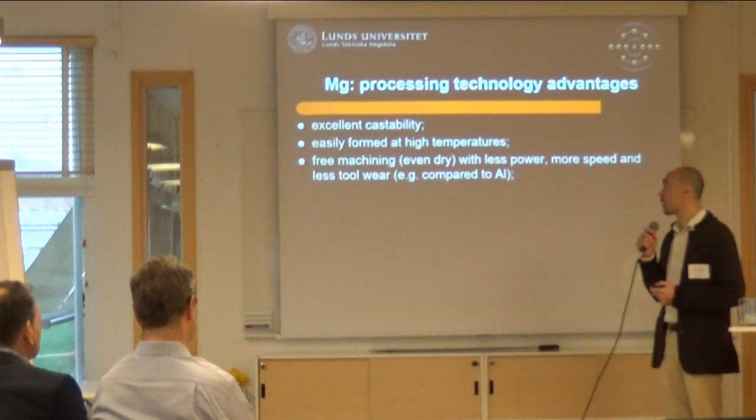Why is it beautiful for business? In general it has excellent castability - I have an example of that from Ford, they make huge advantage of that property. Basically at casting temperature it is much thinner than aluminum, so you can make thin walled products quite easily with magnesium compared to steel or aluminum. It's easily formed at high temperatures, although it is known to have very limited ductility - but with high temperature it is still excellent to work with. Then machining is easier, let's say, not better, but easier than aluminum. It has its own issues, but weldability is still there as well, especially with restrictions to welding.

It's a really good technology for welding. And as I mentioned already, in the modern alloys, it is not flammable if you don't want that.

When it comes to abundancy, magnesium is very abundant. It is the fourth most common element on Earth, behind just iron, oxygen, and silicon. The most abundant source is dissolved in seawater, so we do have lots of resources. Even in our body, most of us have at least 35 grams. It is an essential element in the body.

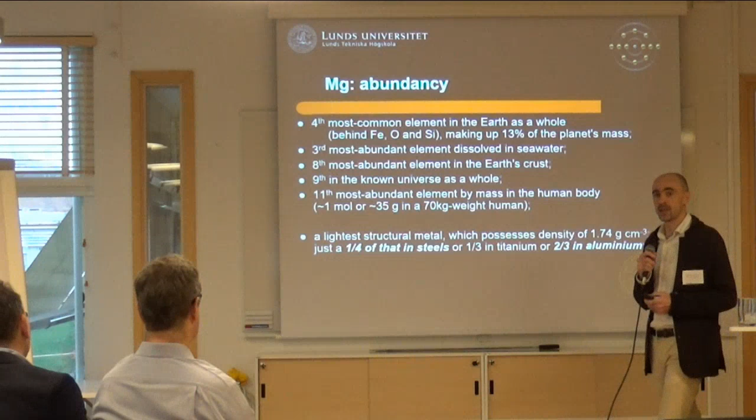It is the lightest structural metal, just a quarter of the weight of steel, and two-thirds of aluminium, one-third of titanium. And it is fully recyclable, which is important in the modern view and the awareness about ecological impact.

What is really interesting and puzzling is that in 2016, when the list of critical materials for Europe was compiled, magnesium was on the list as one of the most critical materials for Europe. The reason for that is not really the existence of magnesium as such, but the cost of technology and manufacturing. This list is compiled based on the supply of sources, not only abundancy.

But new technologies have emerged. It used to be the Pidgeon process, which was very dirty. At the stage of using magnesium, it is fantastic, but at the stage of manufacturing, CO2 emissions were enormous, and China at the time did not care about CO2 emissions, so they used it in bulk. Now they have developed much better technologies, reduced CO2 emissions, and developed much stricter regulations themselves.

On top of that, in Europe we do have resources. We have dolomites here in Skåne, so Sweden does have a lot of resources for that. In Finland, the mining companies that mine nickel and copper have around 40% in stock water from the mines, and they're striving for companies who would help them recover magnesium from there. In steel manufacturing, you can also recover a lot of magnesium oxide. So it's just a matter of developing proper technology for having it here. I would like to encourage this business as well. I think we're ready for that.

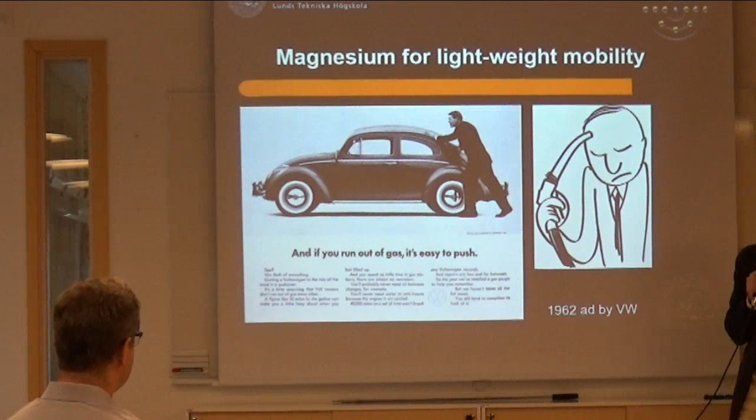So, lightweighting in mobility—just wanted to show this figure, something very modern, with petrol and fuel. And then another picture, which was Volkswagen in motion from 1962. I love in general how Volkswagen is an extremely creative team in promoting, and they were first introducing this Beetle model in 1962, and that is fantastic, I really love it.

So apart from all the beauties of having it, when you move the car, no matter what the propulsion is, if the vehicle is lighter, it is easier to move it. This is fantastic if you get stuck somewhere in the woods. For Sweden this is very important, especially if you're up north.

One more important thing here is the targets. The recent administration in the States has a slightly different opinion, but the targets, at least, cannot change. For light duty vehicles, these targets were set in 2015 and are still in place, but I want to pay attention to the aggressive figures for 2050, when the total vehicle should be 50% lighter than it is now.

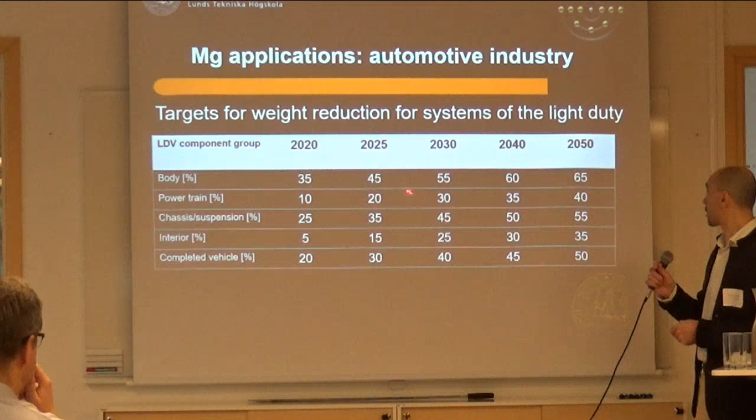The thing is, what we are stacking into the car these days with electrification is that vehicles become much heavier, because you take out steel and put in copper to make it work in electricity and electric batteries. But you save weight on the body quite a lot—65% can be saved in the body because of the use of light metals.

In this business, aluminium did a fantastic job. They pushed hard against the steel business, and that's what Ford came up with for body-in-white using aluminum—and their magnesium response was that.

Again, it was Volkswagen, actually 1939, for the Beetle. A little bit more modern example is the research center, Helmholtz-Zentrum Geesthacht, which they call MAGIC.

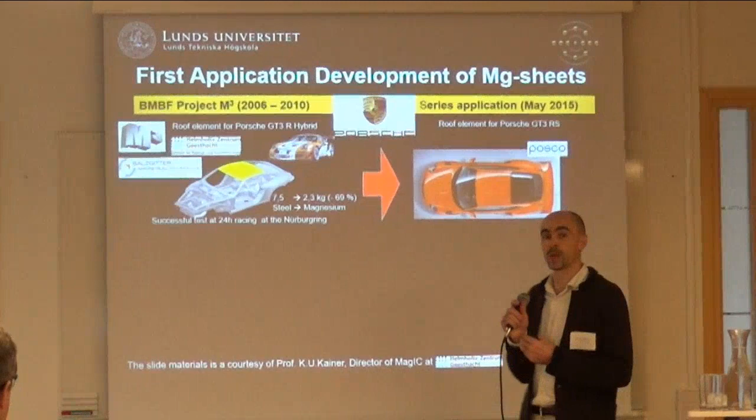Magnesium Innovation Center, it is the biggest research center on magnesium outside of China, and they came up with a BMBF government-supported project when they developed a new grade of magnesium alloys as sheet metal and the technology for its manufacturing.

And magnesium in general as a cast form, it comes and goes all the time, but in sheet metal form it has new applications. There is a secret that Tesla also has magnesium in quite a large quantity, particularly as luggage retainers as well. They don't talk too much about that, they're very secretive as a company in general.

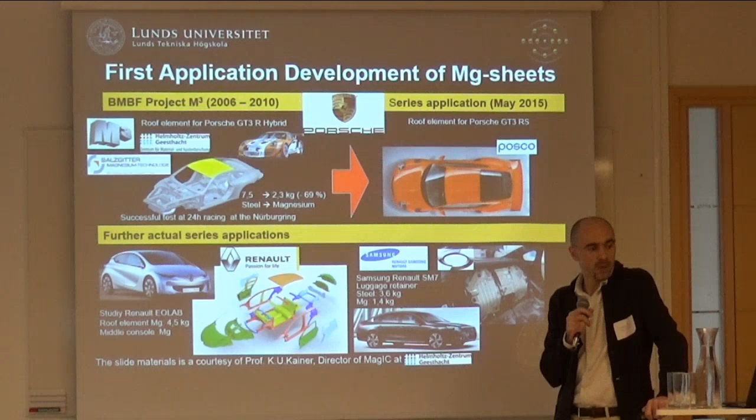So it is opening up. POSCO invested heavily and they developed technology with Samsung on the twin roll casting of magnesium. The volumes are far from those in steel and substantially less than aluminum, but the targets and technology are there. It's just a matter of market uptake, and magnesium as a long-term investment takes some time. Companies invest heavily now in aluminum, steel, new grades of steel, which is another story.

Apart from the apparent lightness of magnesium, another good property is castability. This is an example from Ford, where the steering wheel core was originally produced from 5 pieces of steel, which you need to cast, then machine, then bolt in. When they managed to use magnesium for that purpose, it was just 50% less weight.

But the major improvement in cost efficiency actually came from the absence of necessity to assemble. So they could cast a single piece, which was impossible with steel but became possible with magnesium. Then Hydro, for instance, being an aluminum company, they invest heavily in magnesium technology. So there are a couple of big American companies that invest in magnesium, being aluminum companies primarily.

Then energy saving, low density, high strength - these are just the figures for fuel saving, again important. In this case it is combustion engines, but still it holds for electric vehicles. Then there's the acceptable price for magnesium.

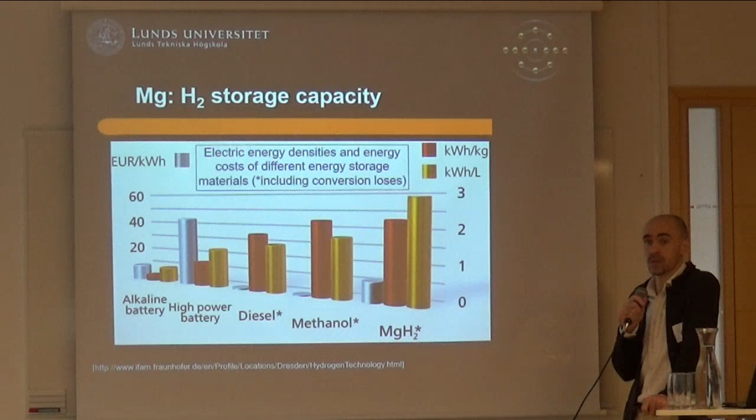This diagram shows the efficiency of energy storage per kilogram or per liter of fuel and the price efficiency with gray bars. So if you look at it here, the hydrogen storage capacity of magnesium as hydride is pretty nice compared to diesel or methanol or even a high power battery, and especially when you look at the cost, it is much more efficient than the battery. There are some issues, it is not as bright as you want it to be, of course, but the potential is there and it is quite enormous.

Body applications, structural metal applications in the human body. As I said, magnesium is a bioresorbable metal. If you look at this table here, if you compare magnesium to natural bone properties and all the modern alloys, metallic materials that are used in this business, magnesium has the closest mechanical property to natural bone. On top of that, it is perfectly biocompatible. It is not toxic. There are no issues as with, for example, cobalt chromium alloys or stainless steel where you have vanadium or chromium.

It is bioresorbable by body fluids. So it is absolutely a fantastic metal to use as a bioresorbable implant. Unlike titanium, for instance, if you have a temporary implant, you put it in the body once, and then it gets dissolved by the time the bone gets healed. You don't need to have a second surgical invasion. Beautiful. There are a couple of issues.

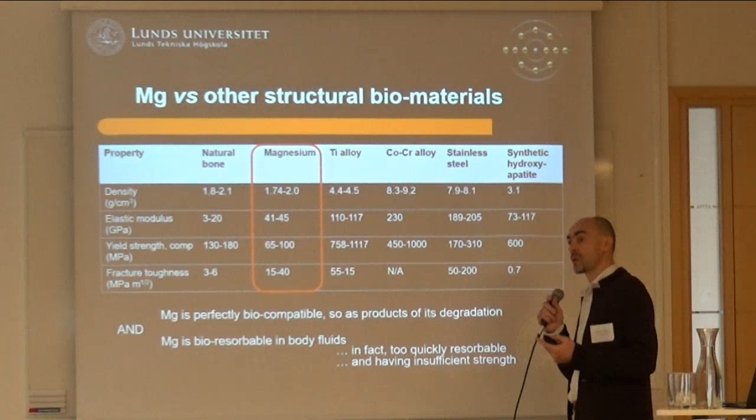It is resorbable too quickly, so we need to control the rate of corrosion or degradation, and we need to improve structural efficiency. So we are working in these directions. We are working on the development of magnesium alloys, tailoring the technology, improving structural efficiency, and looking into the degradation, which is probably the major issue right now in magnesium alloys. That is something which we developed recently.

3 minutes to finish off with that. That's exactly what we're going to do now.

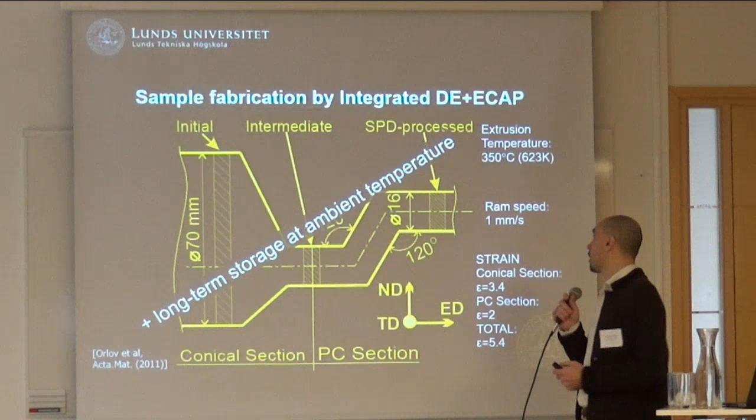So that is extrusion technology. You have a round bar, in this case it was 70 millimeter, and then in one go, we have a conical die, and then it goes through this bent channel, with a parallel channel extrusion. Then we accumulate much larger strain in our material. After the processing of such a bar, and we managed to produce 4 meter long bars in one go, from the initial material condition, which was just a hot extruded state, we got improvement of both strength and ductility because of controlling 2 main parameters.

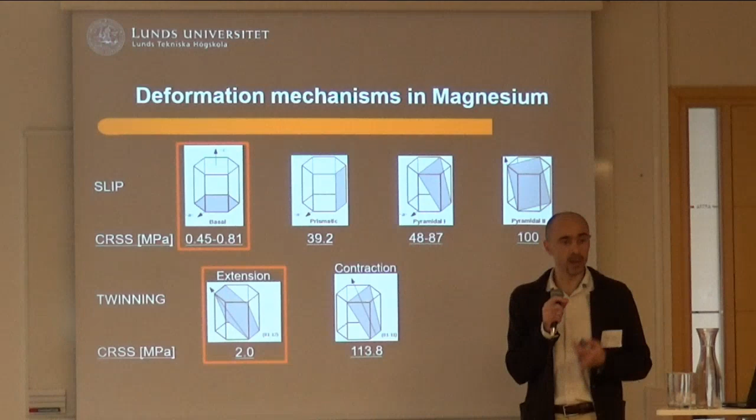Sorry, one educational slide about magnesium. Unlike copper or steel or aluminum, magnesium has a so-called hexagonal close-packed lattice, and the strength of magnesium is controlled by plastic deformation by slip on this basal plane and so-called twinning. The combination of these two systems, if you look at the critical resolved shear stress necessary to initiate plastic deformation in your material, they're working in parallel and they're quite soft. So basically the structural efficiency improvement can come by restricting plastic deformation in these directions. And this can be achieved by controlling the orientation of these blocks and controlling the slip itself by some precipitation hardening.

If this is the unit cell of magnesium, typically in AZ and AM series magnesium alloys, that are aluminum zinc and aluminum manganese alloys, typical cast grades of magnesium, the precipitates are usually in the basal plane, and in ZK series, which is zinc zirconium alloys, they will look like this. And they're absolutely not efficient for improving the strength. And then there are WE series alloys. These are alloys containing rare earth. They're more structurally efficient. They have precipitates in this position, which is quite difficult to develop.

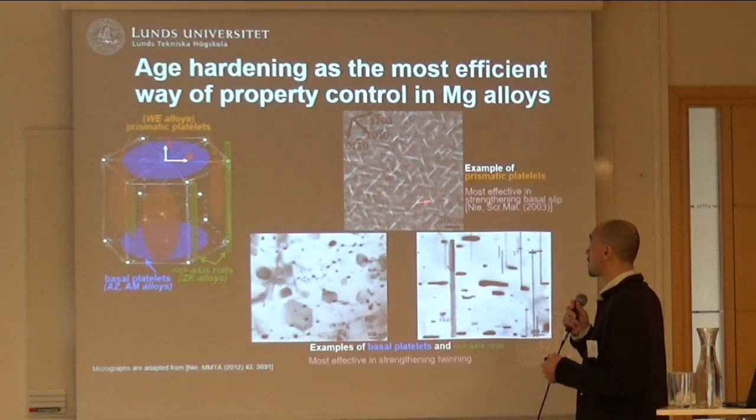What we've done with this ZK60 alloy, which is a zinc zirconium alloy without rare earth, we developed this type of precipitates. We discovered that in our alloy, with the processing which we could do, zinc is a precursor for such features in the microstructure. What we found with transmission electron microscopy in the lab is that we can develop this type of precipitates right here, like this, that are more common for rare earth containing alloys. We found it in a system without them. So we don't need to compete, for example, with electronics.

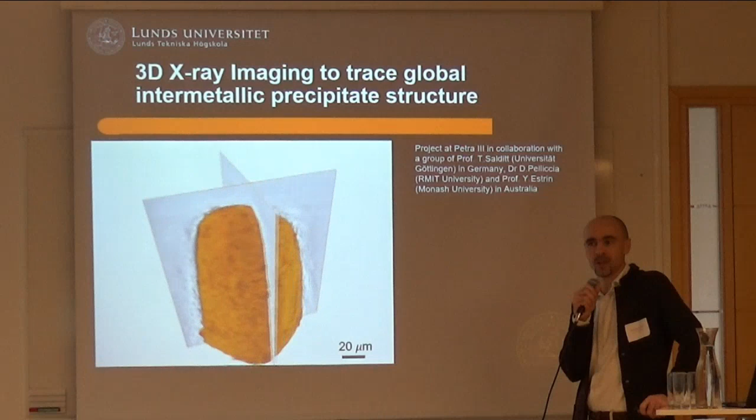So then it was X-ray imaging where we demonstrated that the morphology can be changed. In this case, it is PETRA III, not quite MAX IV, but MAX IV at the time did not exist with its imaging capacity. Now, MAX IV is actually fantastic for working with light metals because the beam quality and the energy range are really great for revealing different features and analyzing them really nicely.

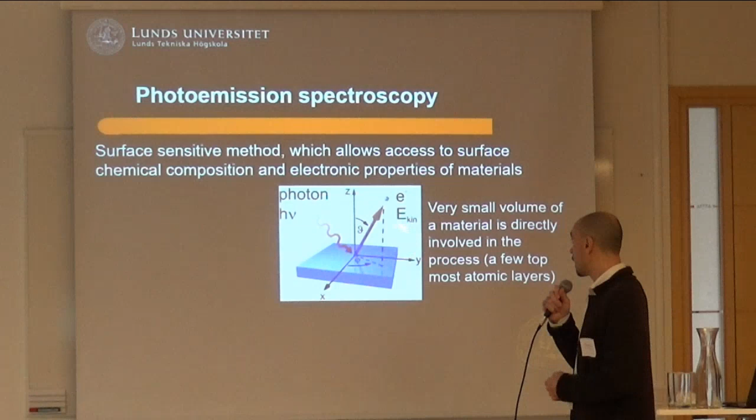Then the main strength of MAX IV is surface science, where photoelectron spectroscopy is used. And in this case, just by bombarding photons, you can analyze really early stages of oxidation. Magnesium degradation is a big deal. Everyone is talking about that. In practice, no one knows what's going on at the surface. Right? So what we are trying to do is to actually understand what is going on there. MAX IV is probably the best facility in the world for doing that. So we are actively involved.

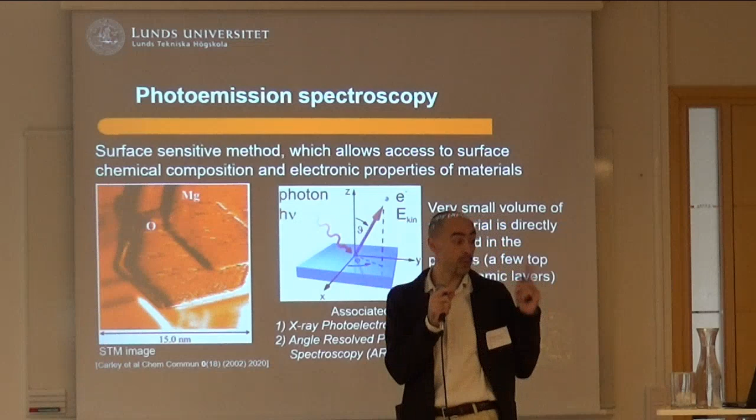But then we developed an in-house facility for magnesium oxidation in an aqueous environment, and from that we come much closer to real-life applications. In the synchrotron, it is still very much a staged experiment. In the lab, we have just a real-life alloy, real-life fluid, so we can do it in a bulk state, and we can analyze every stage of magnesium corrosion and oxidation.

Just a brief summary, we ran out of time. So magnesium alloys appear very attractive, and there are milestones in certification for biomedical and aeronautic applications, and automotive is there as well. And we're trying to make our own contribution to improving that.

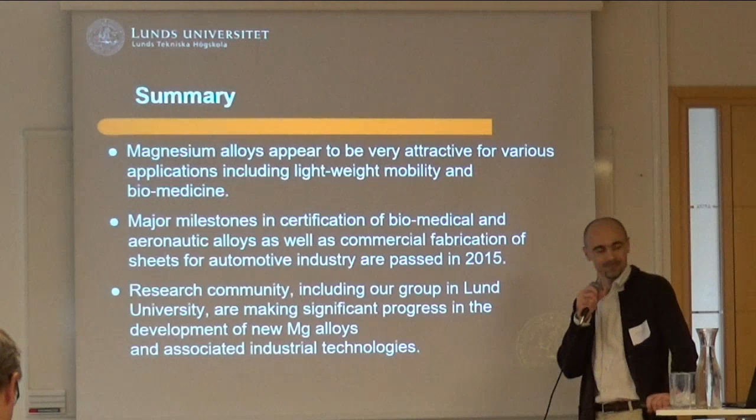What about mining of magnesium? How does that compare to, say, aluminum and iron? Are there any issues with mining? There are no issues, and Skåne is, in Europe, one of the best places for it. You have dolomites, and then you calcinate, and it used to be a very dirty process, as I said. It's Pidgeon. We need chlorines, and yeah, it wasn't as nice.

But there are modern technologies with electrolytic methods that can allow that to be a lot more sustainable with effectively no CO2 emission. So usually you mine it as magnesium oxide, right? It's like milky water. You can actually buy it in a pharmacy. It's a muscle relaxant. And then you need to reduce it. Yeah, and chemical methods are available there.

It's interesting that, for example, Becker uses magnesium oxide in their heating technology. So you do not really have to use magnesium as a metal. You can use magnesium oxide. And then there are some technologies now for storing excess heat with magnesium oxidation and hydroxylation. So these are two reactions. Normally magnesium oxide is not stable in the atmosphere, so it hydroxylates. And while doing that, it generates heat in quite substantial quantity.

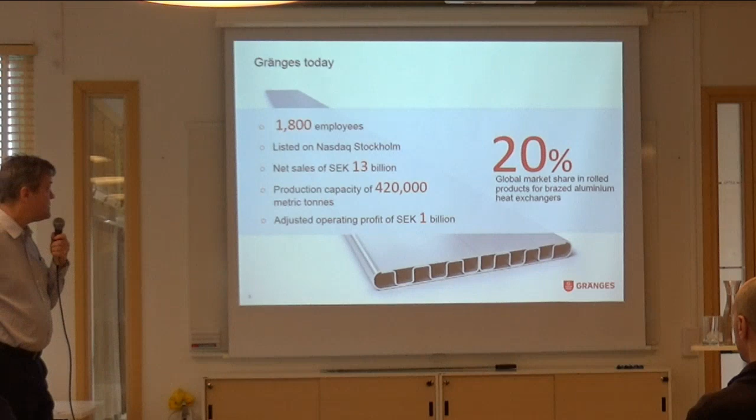So, as I said, Gränges is a publicly listed group. We have a revenue of 13 billion Swedish krona, and we are located globally. I will show that in a short minute. And we have, for quite many years, been focusing on a specific type of material: brazing material for heat efficiency, especially in the automotive industry.

So we have production in Sweden, Finspång, south of Stockholm. We are located in China, Shanghai, and we also have a production location in the US, in Tennessee. Last week we actually announced the acquisition of a big rolled aluminum company in Poland. We're very happy to get them on board.

This is the type of material we are using. It's a kind of clad material, a sandwich type of material, where you have a core alloy and you have a so-called filler metal. I will explain very shortly here about the basic process. And then you also have another layer on the other side, a second type of liner, which you normally have, for instance, in tubes. You see the heat exchanger there and different components. So the heat exchanger consists of tubes and fins and so on.

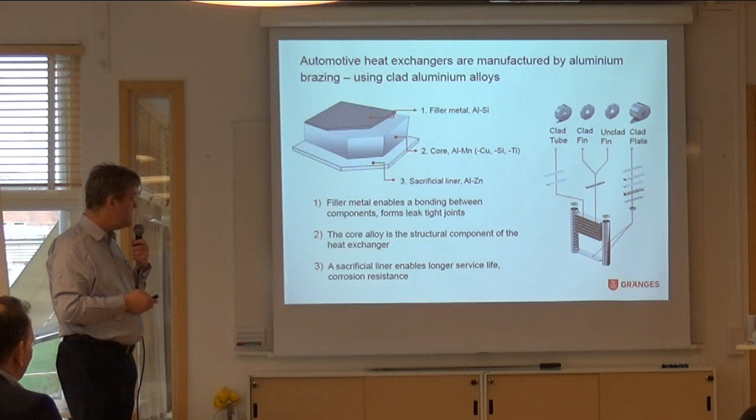So this is the type of process that our customers are using. It's a joining process basically. It's called brazing. So what is happening is that you have this clad material. You can see it down here, to the right. You have the core alloy, you have the filler metal, and you have a secondary liner as well. So what's happening is that you are heating this up in a furnace basically.

And then you get the joining process at the temperature here up to 580 something. And then you get to 600, and then you get this kind of joint formation. So the beauty here is that the filler metal contains silicon, so it has a lower melting temperature compared with the core metal. And that's why you get this kind of joining.

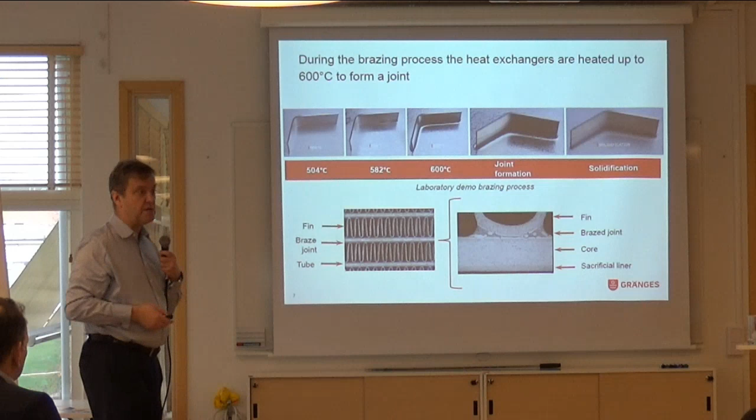So this is something that the automotive industry has been using, the brazing technology, for quite many years. Around 30 years ago, copper was used in heat exchangers; due to price and the weight, aluminium was then basically penetrating this market. And today, I would say more or less 100% of all heat exchangers you use in the automotive industry, trucks also, are of aluminium and use this type of brazing sheet material.

So a little bit about challenges and opportunities for aluminium. And once again, Gränges has been, I would say for 30 years, focusing on this kind of brazing sheet material. We have not really been into other types of material. Today, you see more and more aluminium in automotive applications. Dmytro showed this before here, magnesium. And you can see that more and more aluminium is used in the automotive. The advantage then with aluminium is the lightweight.

So starting a little bit from above, what we see from Gränges side, where we have kind of challenges in the future, there's a lot of things happening right now. It's urbanization, driving, of course, transportation, vehicles, and so on. Digitalization is an important trend as well, and the last one, I think many industrial companies now are really putting focus on this. As Dmytro mentioned about the recyclability. But sustainability, recyclability is a term that is becoming a very big thing for the future, really, for the industry.

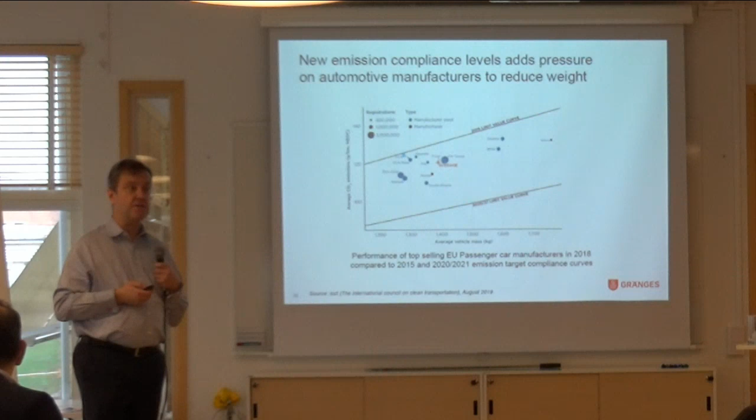That's why the interest now for aluminium is there. Magnesium also coming up as an alternative material. It's a kind of exciting period coming up right now. I think we want to talk more about that later on for the automotive industry. And of course, big challenges as well to meet these emissions, and of course, do it on an industrial scale. That's the kind of trick here. Really a challenge, I would say, for the industry. From Gränges side, we are affected also.

If you're just talking about heat exchangers, which is our core product, definitely these are two big drivers for us. I mean, energy efficiency in that field is very important. So if you're talking about electrification, compared to the combustion engines, you generate less heat, so you have to solve that kind of problem from a thermal management point of view, which is a challenge. Carbon emission, I'm already talking about.

So when you're designing this thermal management system, as we are focusing on from Gränges side, of course, you have to consider these kinds of things. And of course, it affects the heat exchangers, and it affects the material requirements as well. Cost efficiency is another thing. I think it's a little bit of a perfect storm right now when we talk about the automotive industry, which we at Gränges are very much supplying to.

Right now, especially when we have a slowdown in the automotive demand, especially in Asia, but also in Europe, at the same time we have the requirements of emission, we have the change of powertrain, which is a very big thing. So I would say right now the whole industry is almost stopping the development of material or components for the ICE, internal combustion engines; all R&D, all development cost is very much put into electrification and new types of powertrains. I think Johan can mention this, but from a general point of view, that's very clear. That's something which is happening right now.

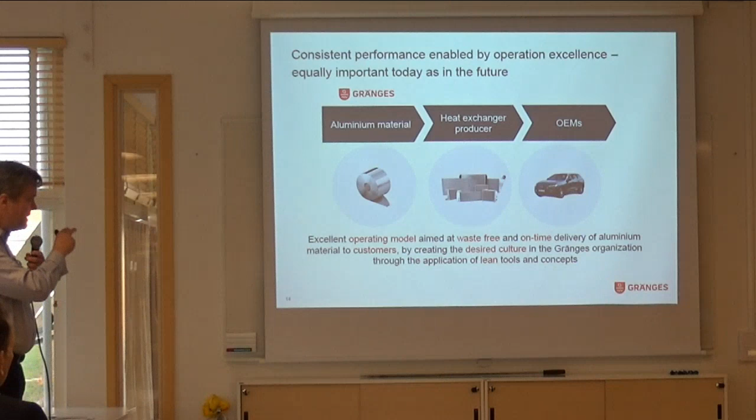This is, of course, also from an industrial perspective extremely important when you are in mass production, especially in an industry like automotive. Everything is about consistency, everything is about retaining the same product quality. From a material engineering point of view, it's many times interesting and exciting to talk about the most optimum type of material. But the fact is that the consistency in product quality is actually more important, because that is a must in order to reduce the cost, which is what everything is about in this type of industry.

Really. I think that's very important also in academia, to always have this in mind, that it's not always the most optimum material solution which is the winning technology. It's in fact from a total cost perspective, and this is very much a driving force for the total cost: to have a consistent process, to have consistency in the product quality. That's still a must, and it will be there also for new powertrain and electrification. Right.

Gränges is active in something called the World Material Forum. It's a French initiative focusing on the material industry's role in the new world and the importance of sustainability. And being in the material industry, I think sustainability is becoming critical. The fact that the resources are limited. We talked about recyclability before, running out of magnesium.

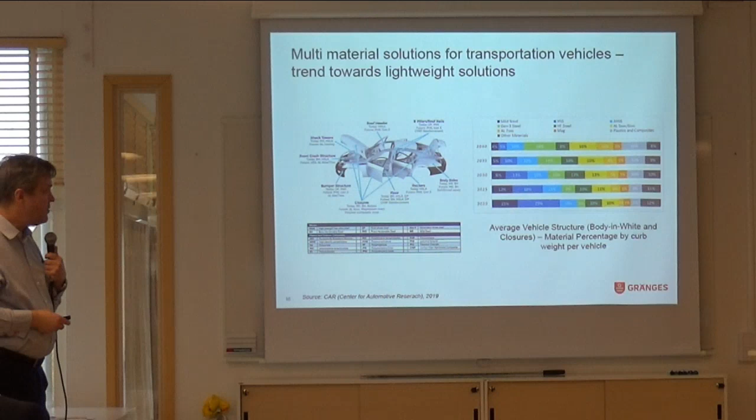You also have non-metallic material, composite material, which I think is also becoming relevant. There's a lot of discussion around cost as a disadvantage, especially for composite material. But if that industry can solve that, then you have a quite interesting possibility for that type of material.

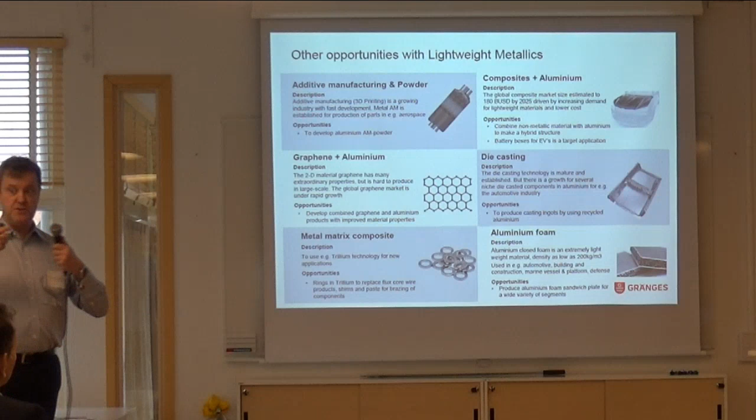I'll show a couple of opportunities here from lightweight metallics. I won't have time to go into details, but just to show what we, and also Gränges, are looking at for future development. AM, additive manufacturing process technology, is extremely exciting. We see some real development.

It's been an industry that's been very much on the hype curve, going down, and probably now going up a little bit step by step. Bigger and bigger interest. The fact is there are possibilities, for instance, even for aluminium in terms of aluminium powder.

Composite, already mentioned, and you can also think about combining composite with aluminium, for instance, as layers of aluminium and composite together. That exists. Once again, here the process cost is the issue. Die casting is an old technology, but we're also interested in it.

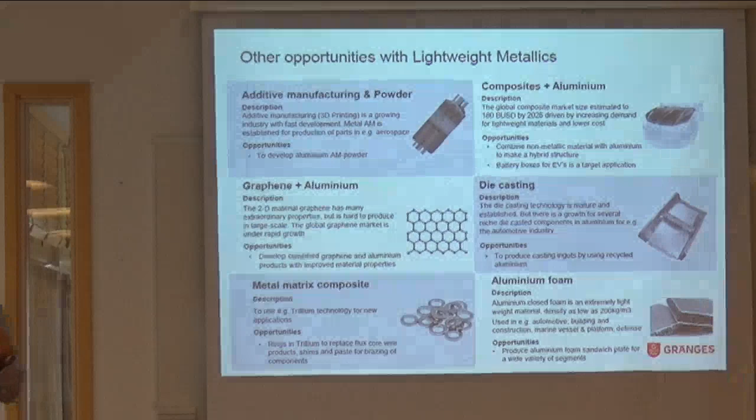We see opportunities related to, for instance, electrification components, new requirements, but also the fact that we can use more recycled materials, which is important.

Graphene - I won't explore or talk more about that, but the fact that if you can manage to incorporate graphene into, for instance, aluminium, you can see interesting opportunities in that type of material. Incorporating graphene into aluminium would be a very interesting new option.

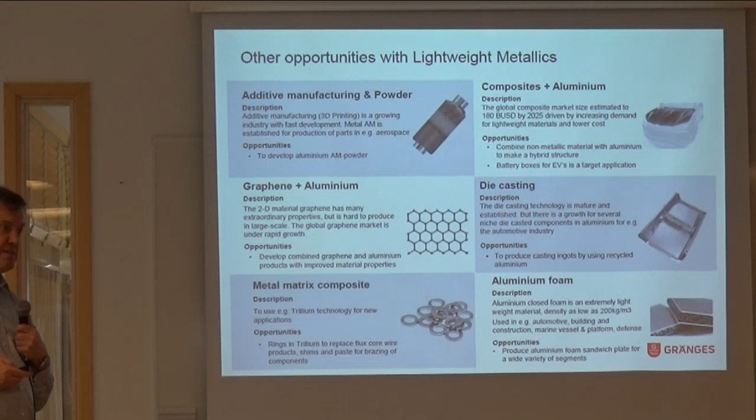The last two here: metal matrix composite, that's actually what I talked about before. In our example, one part is an aluminium foam finally, something which has been in development stage for quite some time. There hasn't been any breakthrough consistency here yet, but there are interesting properties and opportunities. So, in a way, it's an interesting period with a lot of new possibilities for aluminium and aluminium applications, I would say.

So for us, looking at the future global trends, what's happening in automotive electrification is kind of exciting, I would say. At the same time, very challenging.

Energy efficiency, lightweight material solutions, and also utilizing artificial intelligence for material use, moving forward. So this was a little bit about my presentation.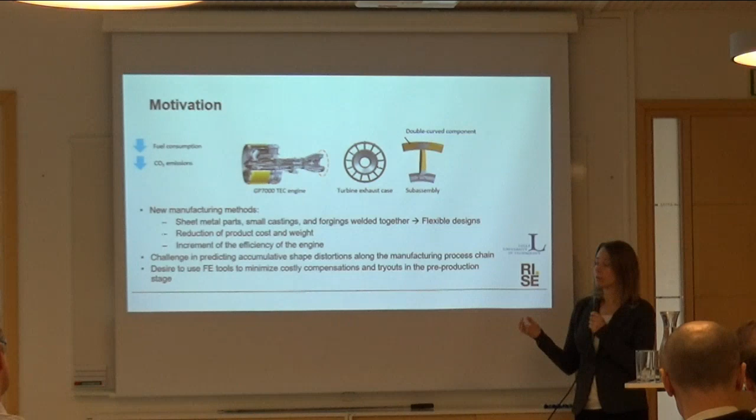The motivation for this project is for GKN to manufacture continuously lighter aero engine components, which have higher efficiency and where you can reduce the amount of greenhouse gas emissions. They are focusing on a fabrication method where they can use different alloys and material forms such as sheet metals, castings and forgings, which they weld together into complete engine structures. By that they can combine the best possible material properties and minimize the weight of the component.

The challenge in this project was to predict the accumulative shape distortions which take place in the forming, welding, and heat treatment procedures, and to compensate for those using finite element model computer simulations. This contributes to minimizing costly compensations and tryouts that they face in the pre-production or development phase.

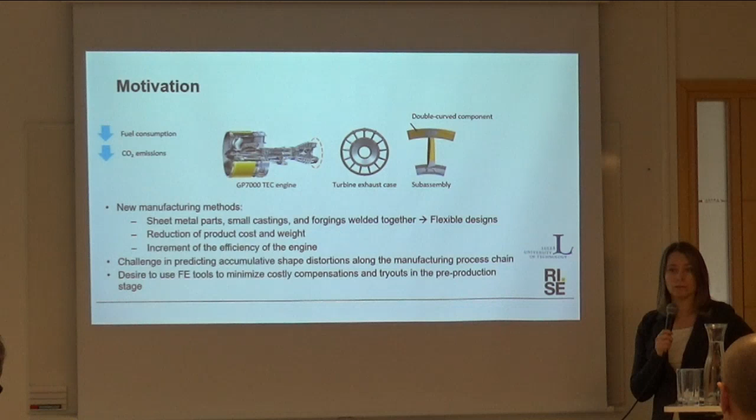So here is a knowledge gap in how the industry works today. For example, we have to use the history from the hot forming procedure as input to the welding simulation or heat treatment simulation in order to have very high accurate simulations you can use, to have a trial and error process in the computer environment instead of a lot of testing and modifications in the pre-production phase.

There is also a gap of knowledge when it comes to predicting cracks during forming in these materials. If we can have high accuracy in these simulations, we can also compensate the forming tooling not only for the spring back after forming but also for welding deformations. So I will give some examples.

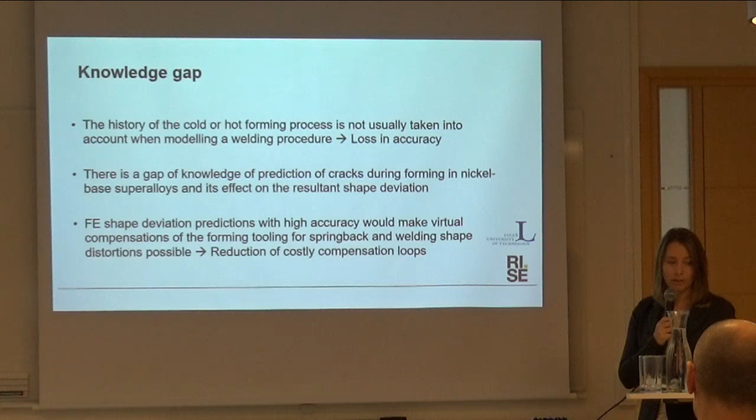In our lab we work a lot with material characterization methods where we can test the material properties at high temperatures, from room temperature up to over 1000 degrees C. We work with tensile tests, biaxial tests, and different types of shear tests where we can study damage and failure properties in materials.

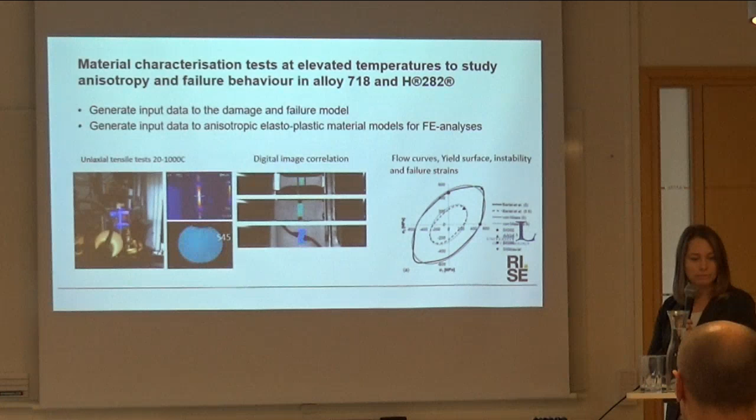In Lluis' work we started with curve forming simulations and testing to produce an outer case geometry, which is a commercially interesting component. We had problems predicting the failure that could occur, but by using a model for failure and damage, we could actually see the crack and the gap in the simulation. This is important because if you can predict when the material starts to fail, you can change the process to fully use the material.

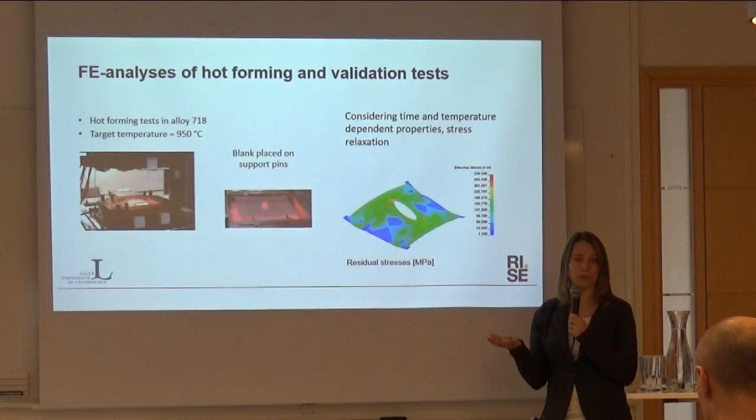We can use the properties in the material where the stresses relax with time, considering time and temperature dependent properties in order to relax the stresses and reduce the amount of spring back. Because if we did a cold forming procedure at room temperature with this very high strength material, it would just spring back, and we would end up with no deformation or geometry at all. By using hot forming, we can produce parts much cheaper and faster than with a cold forming procedure.

We have also done simulations where we don't include stress relaxation, and in that case we have about 10 millimeters of shape deformation, which is out of tolerance for the industry. If we include the stress relaxation, we get a shape deviation of approximately 1 millimeter, which is within the tolerance that the industry puts on the part.

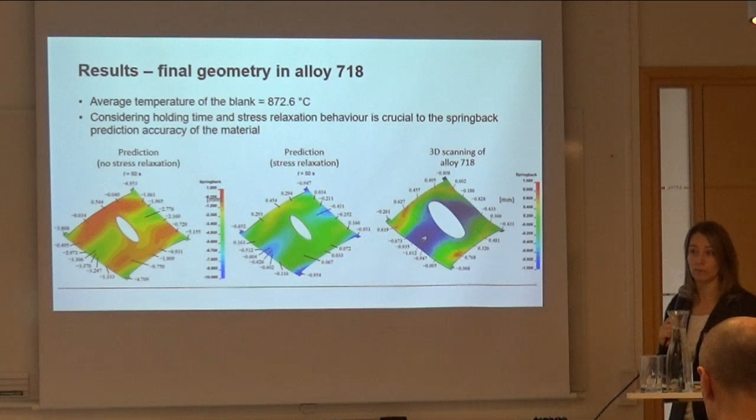We also work with other materials, for example aluminium or titanium, and different high strength steels. Here is also a project with GKN where we study forming and additive manufacturing. We have a sheet metal part which has an AM reinforcement in order to make the part more structural, high strength, and at a minimum weight.

And in this case, we also work with hot forming. In this case, we have formed at about 700 degrees centigrade. And by developing this process, we have been able to cut the cycle time almost 10 times compared to the production that takes place in the US today.

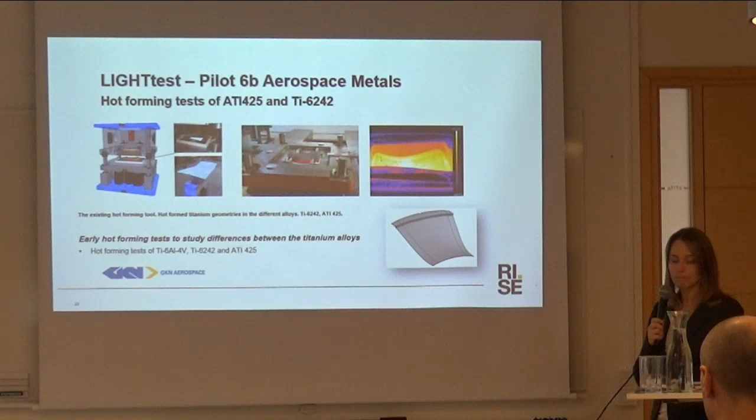And it is by using modeling that we can have a trial and error process. We can test which type of forming temperature we need, how long the holding time has to be for the material to relax. We can also compensate for spring back, and that reduces the time. So in this case, we have done a pre-forming on the line. And the next stage,

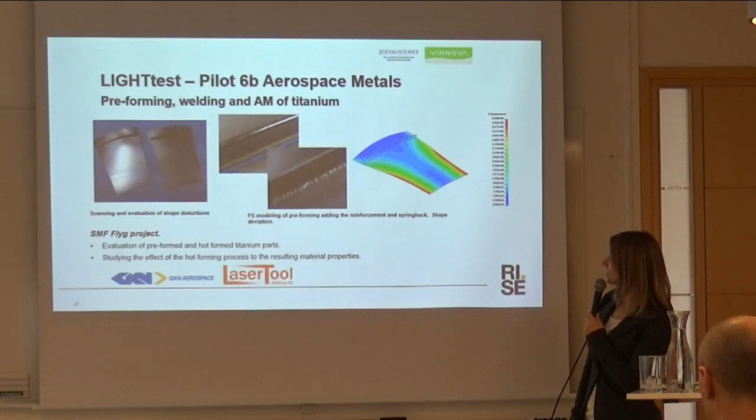The last example is a hybrid hood put together with Volvo Cars. It's an aluminum hood where they study how to decrease weight by adding reinforcement in carbon fiber. And as you see, we have also different types of companies, material suppliers, also tool coating companies that have expertise in tool coatings. And we also have sub-suppliers for Volvo Cars that are involved here because they see that future lightweight components maybe are not only metal, it could be combinations, hybrids of metals and composites.

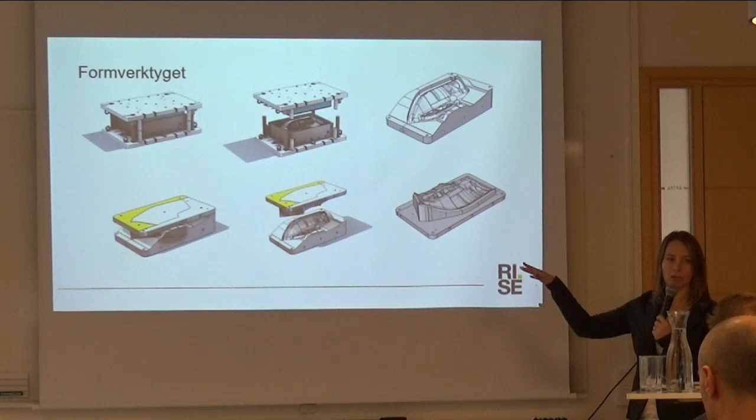So here are a lot of activities going on, and when it comes to the test bed facilities, we have forming tools, different types of forming tools designed to easily change the inserts for different geometries. So in this case, they do the forming and curing in the tool, so it's heated up to about 200 degrees centigrade. And they have tried both SMC and also mixed fibers.

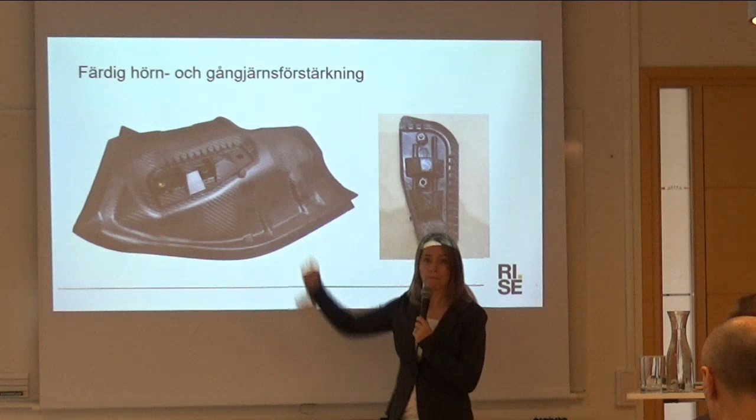So here is the tool frame, which can be used for many different geometries. So it's quite cheap and fast to study different types of parts, different types of materials for different customers. And here is the produced part. They have also started to put in fasteners, elements for joining, in the same procedure, because then you could reduce one production step. You could form and insert joining elements in the same process.

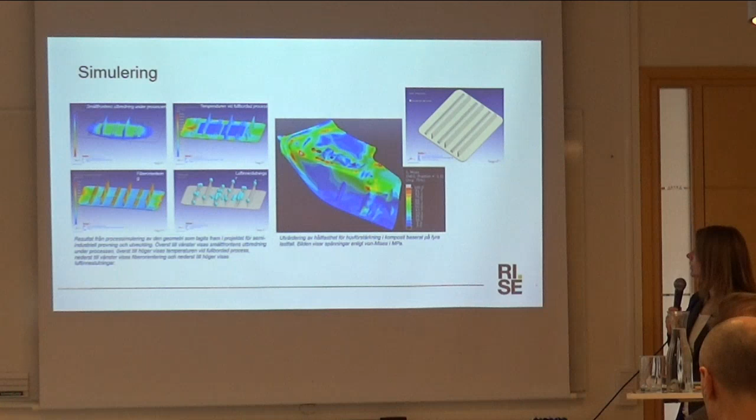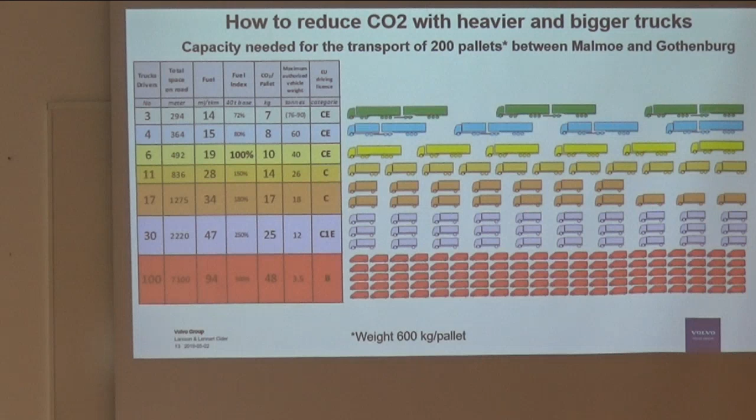We will rest our eyes on this one then. The Nordic countries, where we have water, I mean the electricity comes from water, etc. Down in Europe, it's a bit more complex actually. But railway is great. We work a lot with these intermodal transport systems. Because if there is a train available, we should use that and take the truck to the railway station. Trains probably are better in CO2. Yeah, in CO2 in many cases, for sure.

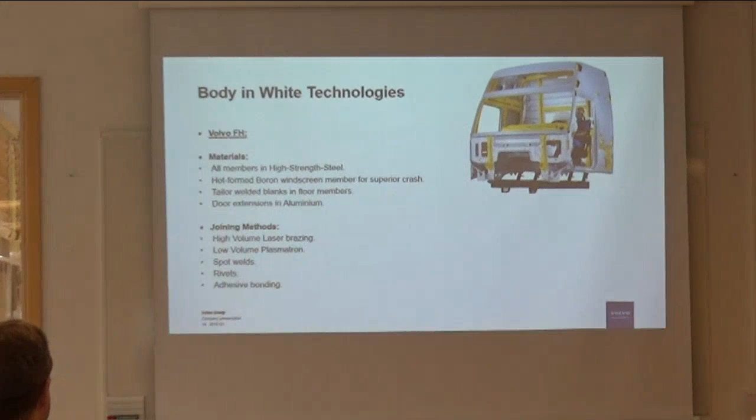This is a truck cab. It's a Volvo FH. It's something we have in production today. We have had it for some years by now. This is our premium truck. And basically, it's what we have. All the yellow stuff here, the members, is made out of high-strength steel. We are using hot-formed boron steel in the windshield members and the doors, not in the picture here.

We also use tailor welded blanks. And all this is joined together with spot welds mainly. Spot welds is great, it's cheap, fast. Laser brazing, rivets, and adhesive bonding. And this cage here is extremely important for the safety of the occupants.

A truck doesn't really have the deformation zones that you would see on a passenger car. It has to be very strong. For example, if you look at the A-pillars here, they need to be very thin because they can't obstruct the view of the driver. But at the same time, they have to support the roof from collapsing in accidents like this. This is quite a common accident type actually with trucks, that they go too close to the ditch basically.

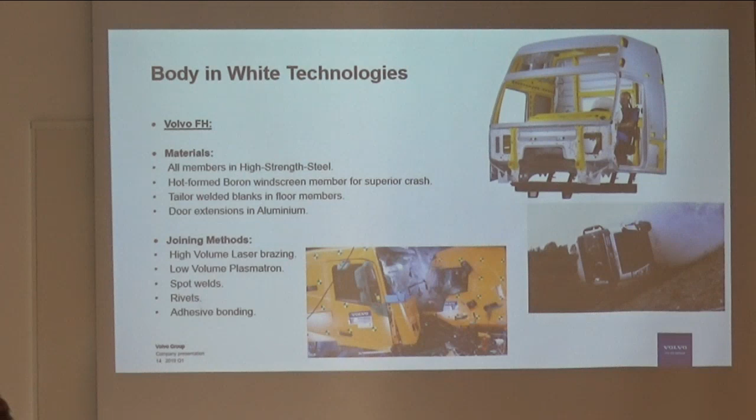And at the same time, all the reinforcements that we see in the roof, floor, doors, windshield help support the cab in accidents like this. Or actually, it's more common to turn it around, and we have a truck hitting another trailer from the back, like in a queue accident. But it's the same kind of load case. Safety is very important for us. We put a lot of effort into making this work. If there is an accident, people must be protected.

Steel is very good. It's great actually, it's strong, it's fairly cheap, it has a high modulus E, we can form it, we can weld it, it's easy to repair out in the workshops, and it's also easy to recycle. But it comes with a weight penalty, for sure. We use aluminium today, more on bolt-on parts for the trucks in different areas: cab, chassis, powertrain.

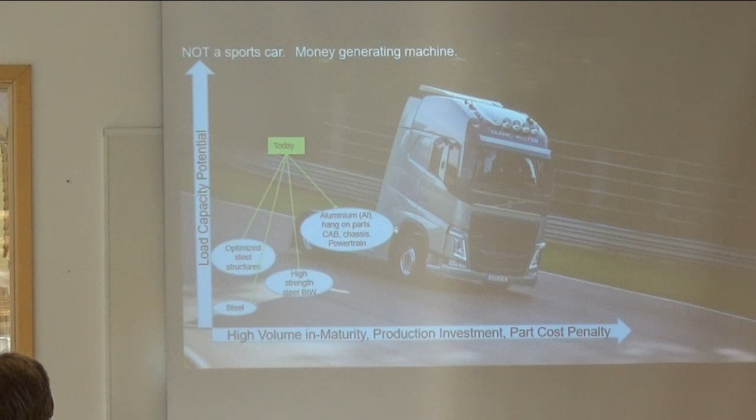Tomorrow, we constantly have an evolution of our products. Each and every time we release a new one, we will have more optimizations, more high-strength steel, more aluminium. On the aluminium side, I think we probably have the big potentials for hang-on parts like doors and hatches for the cab, as you see in the car industry, but also if we can replace many of the nodular iron big parts we have in suspension systems, etc.

We're also starting to use composite hang-on parts, load carrying stuff. In the future, and this is what will change our manufacturing setup, we will use more advanced steels. We will probably use integrated aluminium body in white and chassis. And I'm terribly sorry, we don't have magnesium on the map, Peter. But maybe it should be here.

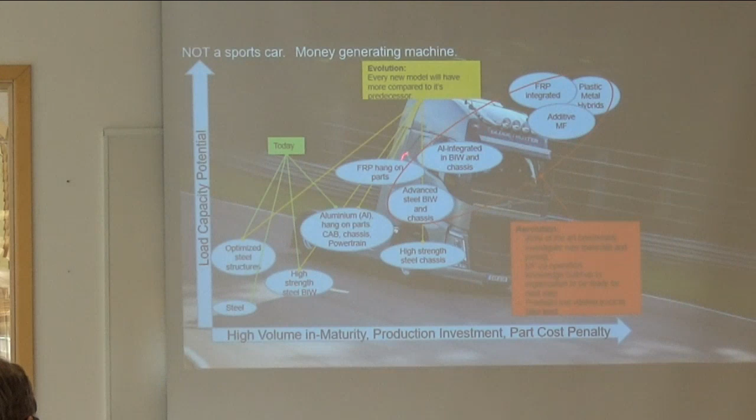The thing is, in this area, if you talk about body in white, we actually are fast followers, because the car industry is really doing the development for us, and we take solutions from them that are mature. So right now it's aluminium. We probably will see magnesium, sheet metals, etc. in the future, so we are of course looking into that as well. Additive manufacturing, we understand the potentials, but it's hard to really get to a manufacturing solution at this point.

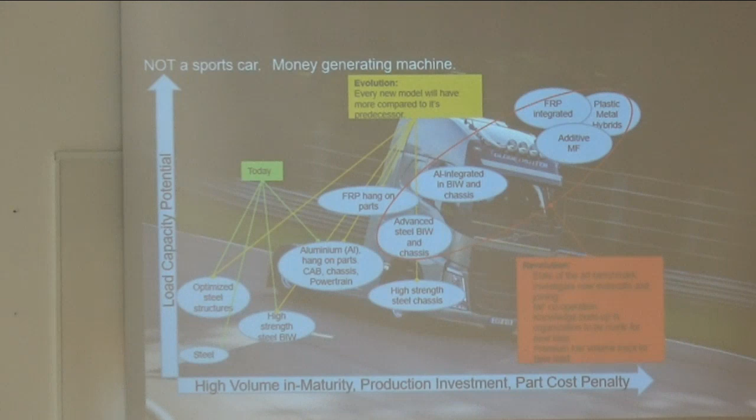What we do in this revolution, as we should call it, is that we are benchmarking, not a good color here, I see. We are benchmarking, we are investigating new materials and how to join them. We have to work with manufacturing very closely. Today, our manufacturing is very effective. We buy coils of steel, we bring them to a factory, we cut, stamp, weld, paint, and at the other end we have a complete cab rolled out. If we are doing this with future materials, we have to maintain that because it enables us to lower the cost of our products.

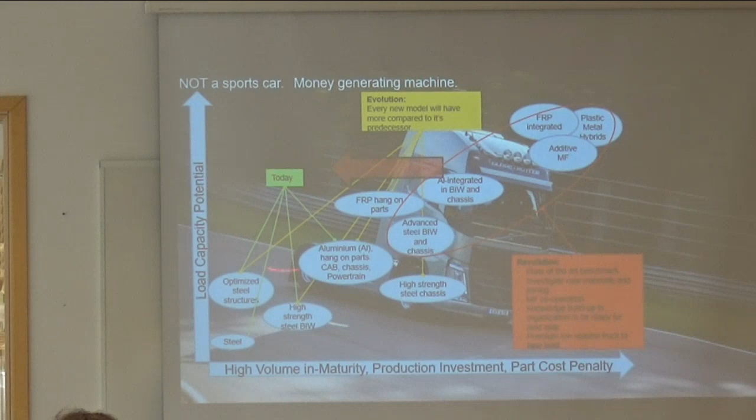But basically what we do, we are building knowledge, and of course these more exotic, high-risk solutions should probably not be exotic and high risk. They should be more in the standard business.

So today I have not talked about the technology revolution or perfect storm that we are facing with a lot of electric vehicles. I have not talked about automated vehicles. I have not bragged about our 1 million connected vehicles. I talked about lightweight. But the thing is, for a truck, if we don't have the load capacity, the customer doesn't care if it's connected or not. We just must have the load capacity there, otherwise the customers will buy from someone else. So we have to do everything.

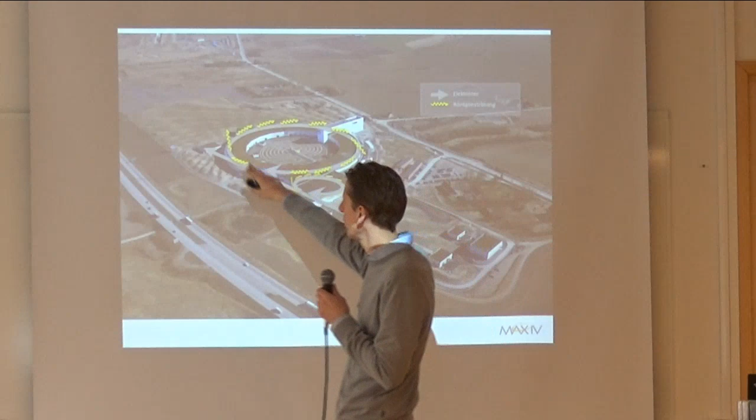But now we're building this large ring also, and we're opening up for other techniques, more scattering techniques and more imaging techniques. So if you just roughly divide it up, you have all these spectroscopic techniques where we get this information about matter. But also we have these scattering techniques where we can see the atomic level or nanometer level information. And then we can put together our signals into images and get these imaging techniques. And I will see if I can show some of the examples here.

Today we have 16 funded beamline projects, and we call them beamlines because we have this beamline, and at the end we set up the experiment. And they all have these interesting names, and they all have different techniques, but they're all X-ray based techniques. And the green ones here, you see we have 8 in user operation today, so we're taking users. And some of the orange ones are in commissioning, and the grey ones are currently being built.

And next round that we open in spring, all these 5 beamlines at the small ring will be in operation, so we'll really be able to serve the Swedish user community in all these spectroscopic techniques. And we are getting online with more and more on the large ring, where we have many of these other techniques. So let's dive down into some of the techniques.

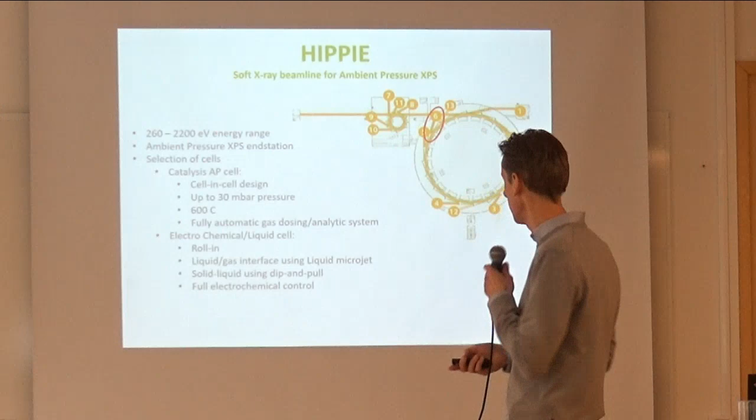So they're open with that they came here and did some experiments, and they were looking into the brazing technology and trying to get a deeper understanding of what's happening in the aluminium flux-free brazing technology when you break this protective layer. And to understand that properly, you really need to understand at the very high atomic level what's happening in the chemistry and in the structure in these layers. And you can do this type of experiments at the HIPPIE station.

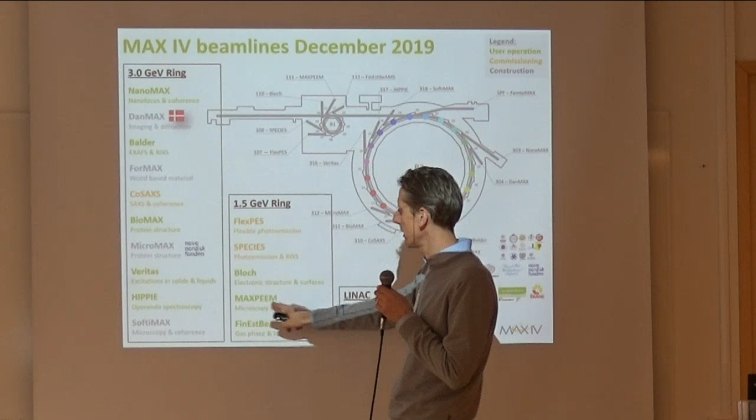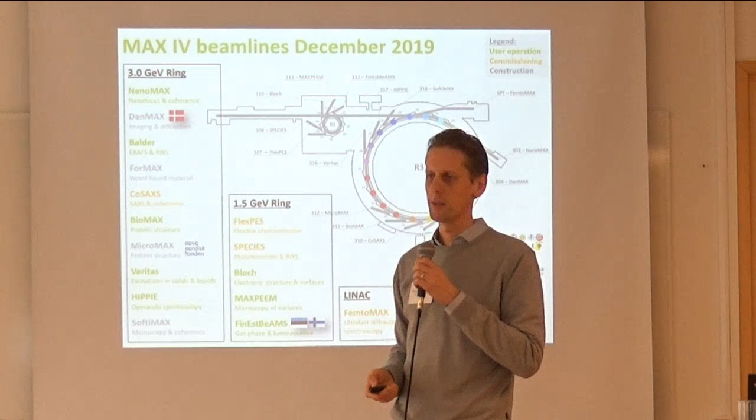Other techniques, I mean, we have many of these XPS techniques. We have a very interesting beamline at MAX IV, and we have people here in the room who know a lot more about that than me, but it's a combined electron microscope, so you can look at the surface, hit the surface with the X-rays, get electrons out, and use that to image materials. But what I do want to talk more about is some things that we don't have today, but we will have in the near future, which are some of these imaging techniques.

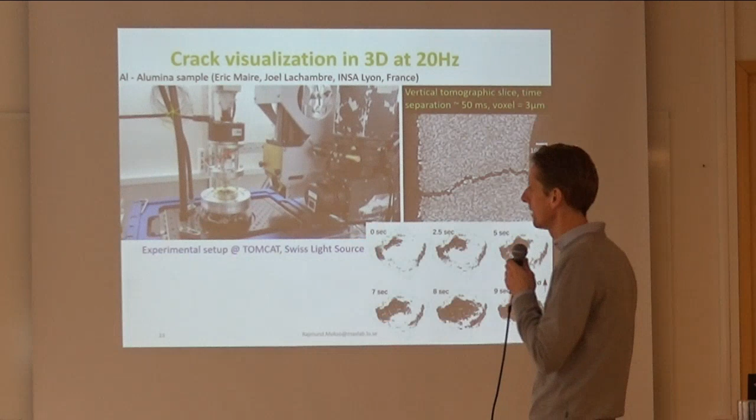And here's, for example, an experiment performed at the Swiss Light Source, the TOMCAT beamline. And this gives an idea of how an experiment can be set up. So here we want to understand the cracking of an aluminium profile. So the profile is put here in the chamber.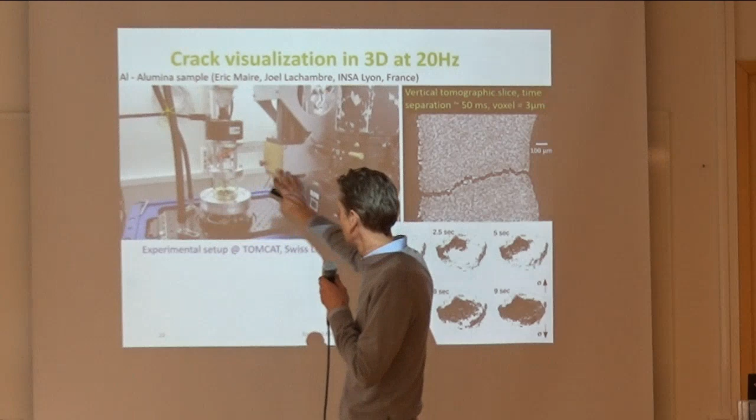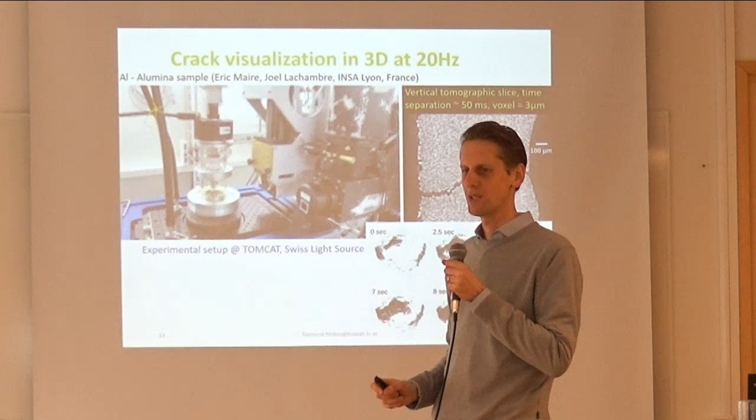You shoot it with X-rays, and you have a detector here. And why do you want to rotate it? It's because you want to do tomographic imaging - you want the 3D structure. Like in a hospital when you get a CT scan, you have a detector and an X-ray source rotating around the body. Here we have a very stable, non-rotatable X-ray source, so we have to rotate the sample instead.

And if you rotate the sample really fast and very stable, you can get several full 3D sets of images per second. Here you can see the crack propagation happening in 3D, and you can dive down and analyze this afterwards. They call this 4D imaging, so time is the fourth dimension here.

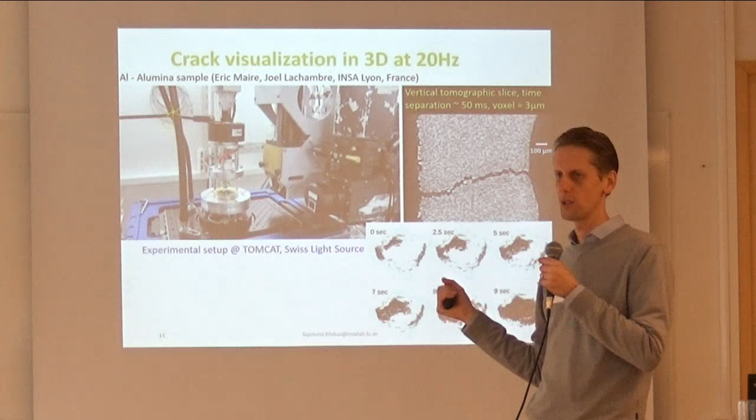It's really been pushed at these synchrotrons, and now the speed limit is somewhere up at, I think, 200 images per second. So I was at an experiment also here at Tomcat, where we were looking at foaming, aluminium foaming technology, and they're really looking into that when it's happening live.

And here's another aluminium foam experiment, a little bit older. This is a 2D experiment, high-speed radiography at 10,000 frames per second. This is a liquid aluminium melt, and you have an injector here - you see the gas bubbles coming out. We're looking into understanding this: when you change the different pressure conditions, how you get the different bubble sizes.

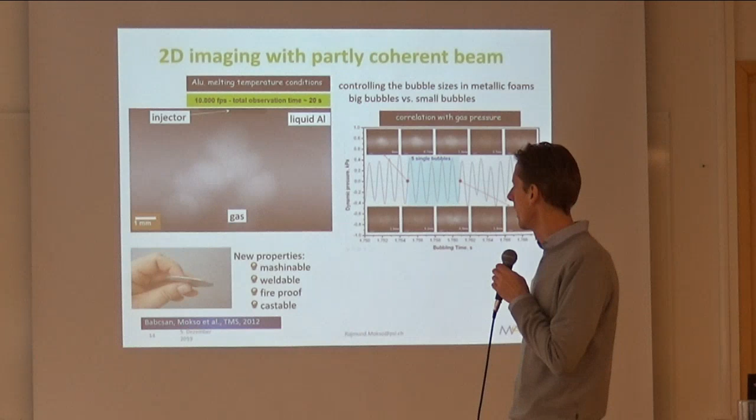Because you want to be able to control that very precisely, small bubbles, to be able to build these really thin profiles with small bubble sizes, you can say. And all of these X-ray technologies are available in lab scale, and you can do tomography in the lab scale.

But if you want this really high resolution, maybe you want to rotate your sample over 24 hours and collect the data. But here with the X-rays, so bright, so many photons per second, you can get all the information in a fraction of a second. So you can start to think about different technologies and techniques - you don't just study matter, you study processes. And that's really the key, why you want to come to a large-scale facility like this: when you're not just interested in understanding the properties of the matter, but also understanding the process.

How do we work with industrial users? Well, we work in different ways, but one way is reaching out and talking about what is possible, making companies understand that the facility is open also for them, and talking a lot about how it's open.

If you come to a facility, you come with a problem or challenge or something that you want to understand better. And in the end, you want to be able to, of course, move forward. You see the experiment is the piece of the puzzle here in the middle. At MAX IV, we have the stuff to help you perform your experiment and get the most out of it. But before you get here, you also need to do some work.

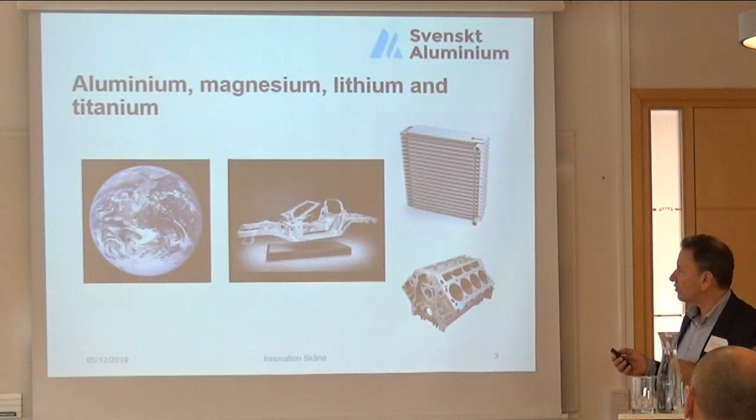About 8% of the Earth's crust consists of aluminium, so it's an abundant material, and it has unique properties. It forms an oxide film in the atmosphere, which is very dense and prohibits further oxidation, so it's corrosion resistant. It's easy to form, it's very light, 2.7 in density. It has excellent conductivity of both heat and electricity. It's energy intensive to produce, about 13 kilowatt hours per kilo, but only 5% of that is needed in the recycling stage.

Typical products of aluminium are typically produced as extrusions - it's like squeezing toothpaste - or in rolling, which Torbjörn talked about earlier, and in casting. We see this in some of the products, like in car chassis. You find extrusions in certain frames, in forward and side beams, things like that. Rolled material in heat exchangers, and cast products like the engine block.

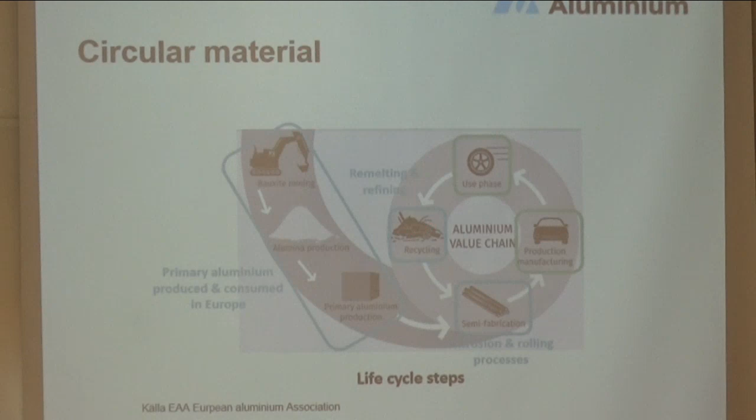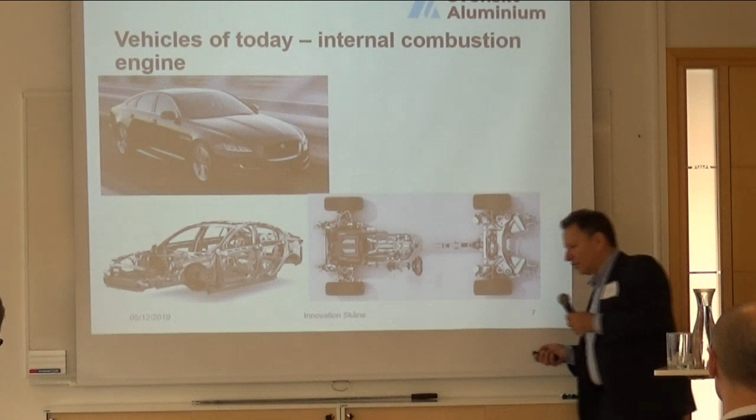And this is driven by weight savings. The more things you put into the car, the more weight you want to save. It's due to emissions and also for handling and driving pleasure.

But this represents the car today. This is another car today, the Tesla Model S, which also has an all-aluminum body and chassis. The difference is here, where instead of the powertrain we saw before with the combustion engine, we have a huge battery and a frame. We have an electric motor, some suspension, of course, and wheels, which are quite similar. But this represents a big change in the products that are coming.

Tesla has one alternative, Renault has one, etc. All the different companies have their own versions of this. And it's like Torbjörn said, this is just the beginning, and we don't know which technique or which solution is going to be best, or if there's going to be several that are best. So it's sort of in an initial position.

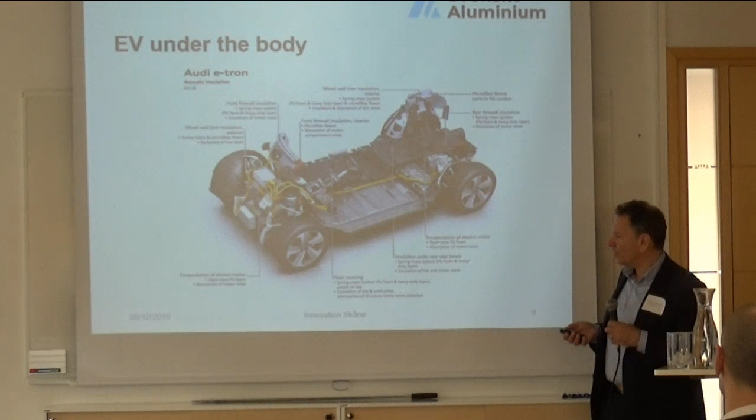So there's a lot of aluminium going into new products. I heard that Volkswagen signed on an extruder for 100,000 tons of aluminium over 10 years, for battery box applications. It's a huge market.

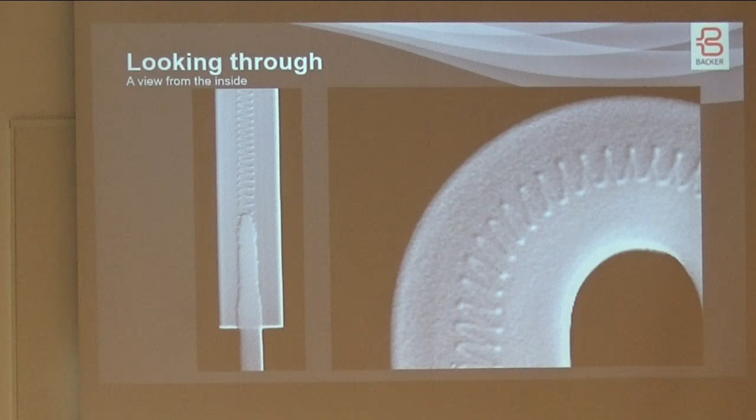Just a few of the challenges we face. And maybe I should say that so far we're on top of them, but competition tends to tighten challenges and push them further. So there is always an end to where you get.

So the panel that has been circulating, we're making that in pretty high volumes, and it goes into a radiator that you can see on the walls. And we don't have many of them in Sweden. We export a lot of them to countries where maybe you have much nuclear power and much electricity, and you use that direct electricity for heating.

So our challenge in this case is the temperature. They are getting pretty hot inside, and touching onto a temperature where the aluminum starts to soften a bit. Of course, a bit depending on what alloy you use, but then we're under very high cost pressure. So there's a limit to how fancy alloys you can use.

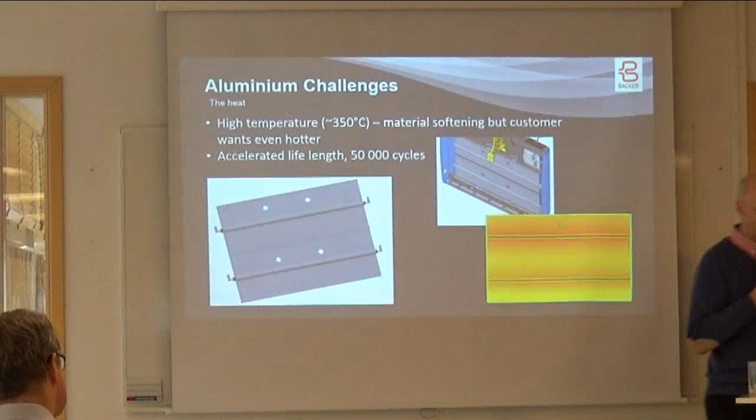Then eventually, what happens is that it moves so that the element channel eventually breaks. But we're still on top of the 50,000 cycles, although just. And we see that to save money, the customer would like to make the element even a bit shorter, smaller, to save materials and raise the temperature. Well, that's where it starts getting difficult.

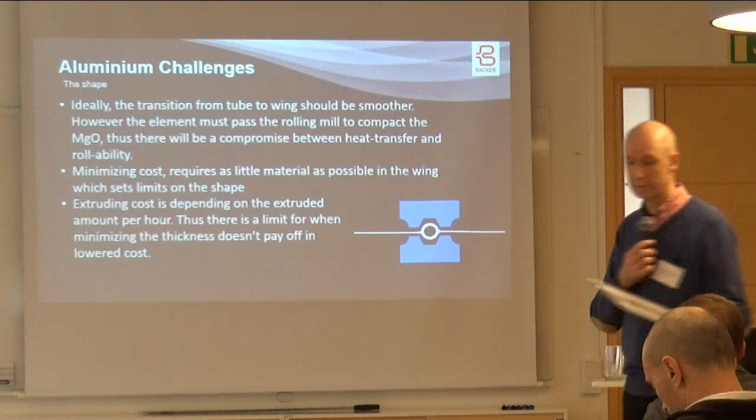When manufacturing the two wings, maybe you noticed that the panel consists of two wings that are pressed together in the middle. So when manufacturing these, as I mentioned, they are rolled to compress the magnesium oxide, and so there is a contradiction, you could say, between the rollability and the heat transfer properties.

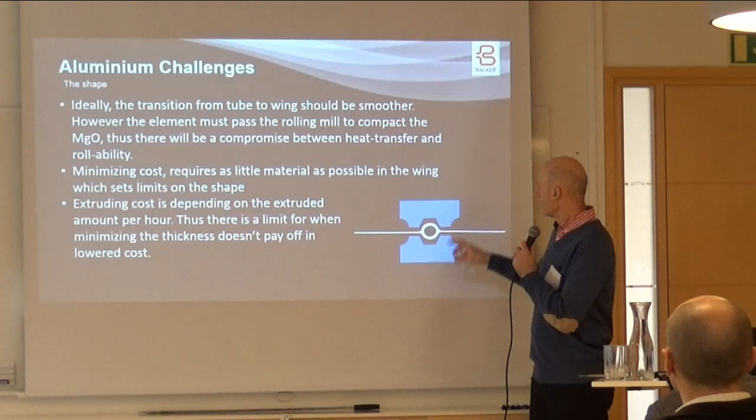You would like to make a very smooth transition between the tube and the wing. But if you make it too smooth, there isn't any place for the rolls to roll it and compact it, or you have to make the rolls so tiny that they break. So you can't make the wing ideal in heat transfer, because then you can't roll it. So that is also a challenge.

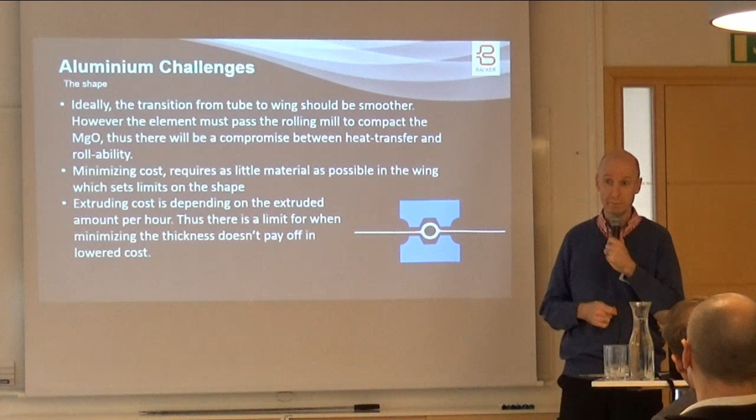And then as well, making it thinner, taking off any kind of zigzags that make it stronger, of course reduces the amount of material and makes it cheaper. But then you meet the limit when it takes too long to extrude it, so that the extrusion will be so expensive that the saving of material doesn't help anymore. So there too we are on kind of a limit. And there's of course always technologies, but again the cost pressure is very, very high on a volume product like that.

And finally, another challenge that we are facing is that we want to enamel. Some of our customers want to make the panel look nice from the start, so you don't have to build it into a radiator. You can see panels like that in doors entering shops, or they sit in the roof and heat from above. And to make them look nice, you want to enamel them. And the process of enameling itself risks bending the panel so that you can't fill it with magnesium oxide and put it through our machinery afterwards.

So we believe we're on top of that too, or getting there, but there is always a challenge between producing to the cost the customer wants to pay and still satisfying the customer's wishes on niceness or effectiveness or both. So that was essentially my presentation.